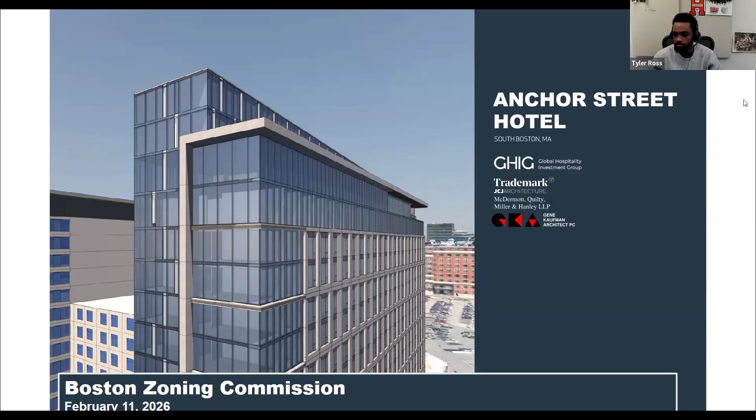My name is Jason McDonald. I'm the planner that reviewed this project. The proposed project will be a third amendment to the development plan for Planned Development Area 50, located in the South Boston Neighborhood Zoning District's D Street Neighborhood Development Area Sub-District. It is governed by Article 68 of the Zoning Code. The proposed project is also located in the Coastal Flood Resilience Overlay District, governed by Article 25A.

The proposed project is consistent with PDA 50, which is in turn consistent with the original vision for a convention center district established by the Boston Redevelopment Authority's 1999 Seaport Public Realm Plan. The proposed amendment would allow for a new 14-story hotel with a gross floor area of approximately 150,000 square feet to be developed adjacent to the existing hotels described in the PDA overlay.

The new square footage added with the existing hotels on site would be a total of approximately 478,645 gross floor area, which is under the maximum gross floor area of 899,000 square feet listed in the Second Amendment. The Second Amendment does not prescribe other dimensional limitations to the overall site besides the mentioned gross floor area.

No new uses will be introduced to the PDA. The project is subject to further design review from the planning department, with particular focus on compliance with flood resiliency requirements. I will pass off now to Mark from the development team.

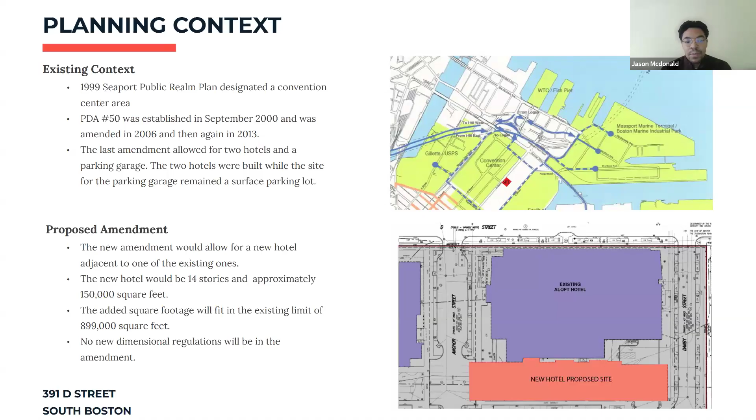Good morning, Chairman Nichols, members of the commission, and those attending. For the public, Attorney Joe Hanley, McDermott, Quilty, Miller, and Hanley. I am zoning and permitting counsel for the proponent, Global Hospitality Investment Group. Their principal for the project, Grant Nassif, is on with us, and I am here with Mark Rosenshein from Trademark Partners, who is our project manager and leader on this project. He will take you through the presentation.

Before he does, I just want to give a brief overview and also thank Tyler and Jason and the BPDA for all their work, and the members of the Impact Advisory Group, the local elected officials, and the other stakeholders that we've worked so closely with.

You will see on the screen in front of you the development site. My client, Global Hospitality Investment Group, is the owner-operator of the existing Element Hotel and the existing Aloft Hotel, which is under a long-term land lease with the Massachusetts Convention Center Authority. You'll see the site at bottom center, plan north. You'll see the Thomas M. Menino Convention Center and its lawn on D, obviously in the heart of the Convention Center campus. Next slide, please.

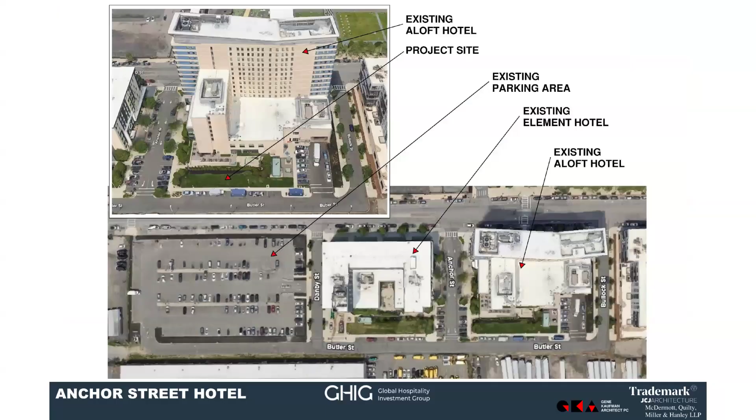So just to give you a little more perspective, plan upper left, existing Aloft Hotel. Again, this was approved, as Jason indicated, back in 2013. Our clients bought both the Element and the Aloft as constructed and have operated them since. And the site itself, which you'll see with the arrow, is in back along what's called Butler Street, which is an MCCA right-of-way owned by the Convention Center.

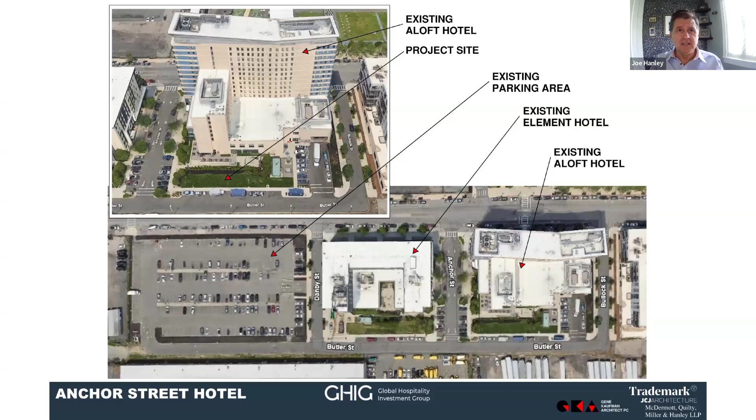And then at the bottom, you'll see it in further context. Bottom plan left is the existing surface lot, which is available and utilized by the Element and the Aloft, and has ample parking to accommodate this new third hotel. Next slide, please.

So Jason did a really good job going over this, but I'll just hit it really quickly. Again, we are here to amend PDA number 50, which was approved by this commission in 2013. It includes the two hotels that I just showed you, the Aloft and the Element, completed in their earlier phases. And what's important to note is this PDA contemplated a third hotel at this location. By its language, it merely required that we return with a development plan via an amendment to confirm that it's in compliance with the allowed dimensions, which we are.

And I think Jason did a really good job going through this. As Tyler indicated, we started the process for Article 80 large project review in March of 2025. We filed our PDA amendment in June, and it was recently approved by the BPDA board in January.

The project program is 438 lifestyle brand hotel keys, akin to select service. This is very much intended to serve both the day-to-day visitor needs for the convention center, but also be an affordable and approachable opportunity for folks in the neighborhood and the city who might have guests coming, or others seeking to stay in the area.

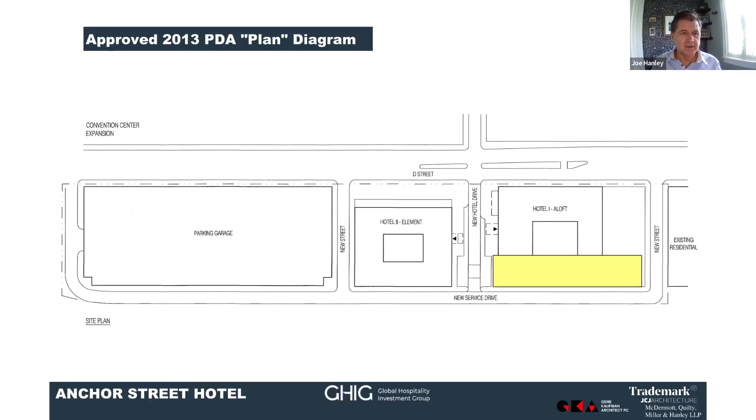So I'll hand this off to Mark at this point to show you how this all comes in context. Before I do, my client is grateful for this opportunity. We all know the convention center is doing very well, has come out of the pandemic exceptionally well. They've identified a huge need for additional stays, approximately 1,000 new hotel rooms necessary. We're very excited to be delivering nearly half of that with this PDA amendment. We thank all the stakeholders that worked with us, including the Hotel Workers Union, the building trades, and folks in the neighborhood and elected officials. It's been a very positive process for what we think will be a merit-based development that will help contribute to the future of the convention center and the neighborhood as a whole. So Mark, I'll hand it off to you.

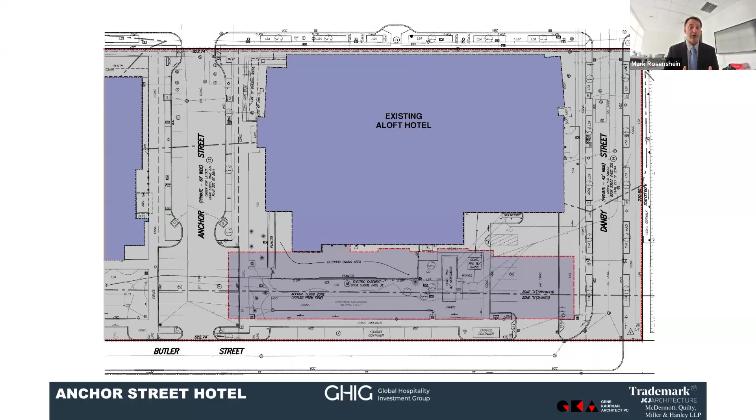We're managing the existing electrical and emergency services. For the Aloft, the generator and electrical gear are sitting on the ground right now, which means they are in the coastal flood overlay area. As part of this, we'll be lifting them up and putting them on the roof, increasing the resiliency component for the Aloft Hotel, with all of the new equipment for the new hotel also going up on the roof. This improves both properties as far as compliance with the resiliency overlay district.

Next slide, please. You can see here the relationship between the two relative to parking, which Joe mentioned. Right now parking for both existing hotels is part of a lease of spaces in that surface lot. There is more parking there than we are leasing. The MCCA controls an additional 100 parking spots; we will be leasing 75 of those in addition to the ones we already do, to accommodate surface parking for this new hotel. We expect there'll be a lot more pedestrian traffic coming down Butler Street to the new entrance, compared to the way folks go now, up to D Street to get into the Element and the Aloft.

So we've been working with the planning staff, landscape and outdoor space design folks in particular, to talk about getting some street trees, some open space, and improvements to the screening and landscape component on the Butler Street side of the Element and Aloft Hotels, to make that walkway and path better for both our guests and the general public. Next slide, please.

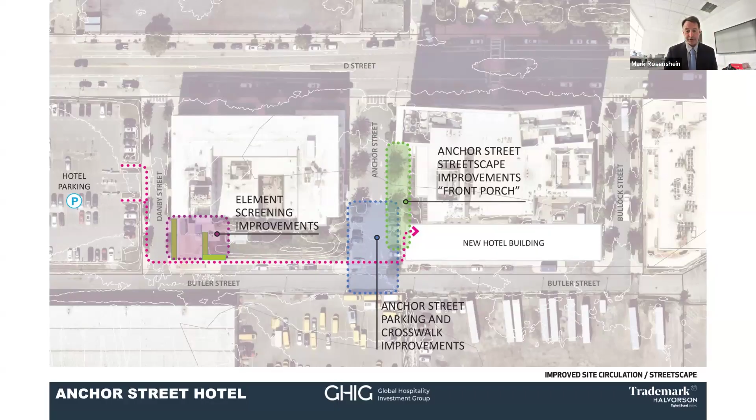This is with your orientation changed — Anchor Street is now at the bottom of the page, the main entrance. What we're really trying to do is create a plaza and an accessible moment at the entrance. Again, this is behind the Aloft Hotel; it needs to have its own front porch and its own front door. You can see the steps and the ramping, all of which is to accommodate that resiliency requirement.

Right now the site is low, down at elevation 17. It needs to be up at elevation 20.5. Where we will end up is at 19.75, and the reason we're not up at the 20.5 number is the existing Aloft Hotel, which we are connecting to, was built at that 19.75 number. So we raise it up that high, and then we will be providing deployable dry flood-proofing components at the entries and exit points around the perimeter of the building to get us up to total compliance with the 20.5.

As Tyler mentioned, they'll be continuing design work with the planning department to ensure compliance with the details of the resiliency overlay district as we get into the fine print of how to make the doors and openings resilient and flood resistant.

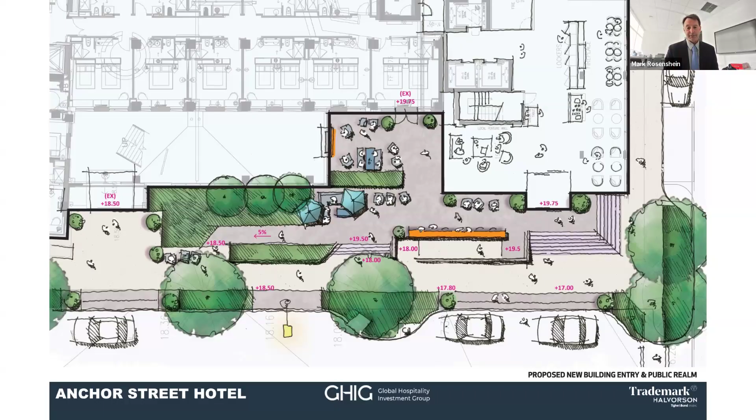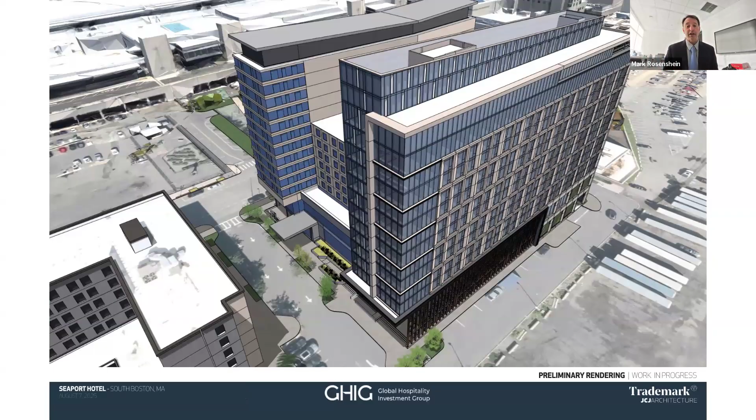There's an image of the hotel on the left side, and you're actually looking at the Aloft Hotel. We wanted the design to be complementary but distinct, so the architecture is not a great departure from the existing. We think it's a beautiful building that we currently own at the Aloft Hotel. This complements it, but has its own architecture and style, a little more glassy, a little different look to make sure it's distinct.

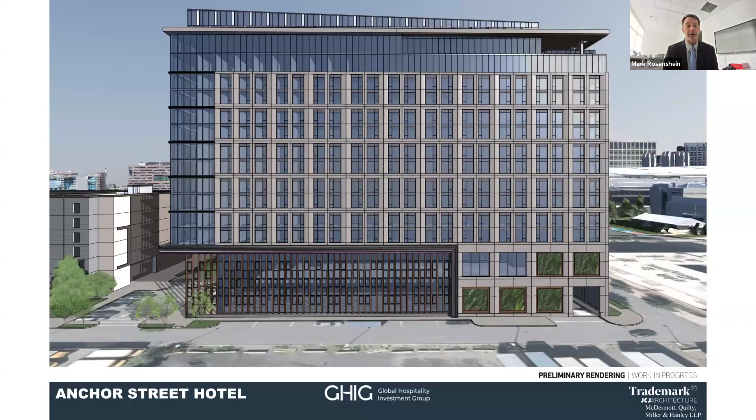From Butler Street, the side opposite the convention center, you can see we put a screen at the bottom. We're hoping to get some real growing and live space there. We've enclosed, after conversation with the planning department, the loading area that's currently open for both buildings, to make it more visually attractive, including a solid wall to the right, which will prevent visual connection through to the loading from the residential building adjacent to this one.

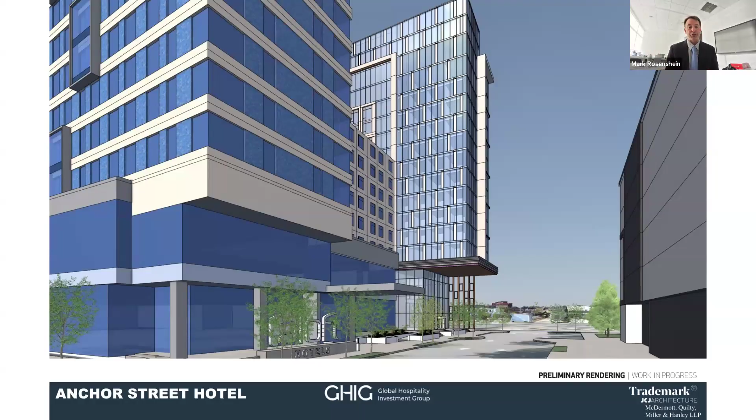This is the key view looking down Anchor Street from the convention center side, on the corner of D Street. That's the Aloft in the foreground on the left, and you can see the new hotel in the background. We cantilevered and put a canopy over that provides a real entry point and entry moment, giving it a visual face. Eventually, we'll work with the planning department to get signage approved once the flag and brand are determined. You can imagine that sign on the canopy allowing you, as you come around the corner, to see that front door and know this is a distinct and separate hotel from the Aloft.

We worked with the design team to make sure there's good articulation, that the facade is well detailed and will be an attractive building in the neighborhood.

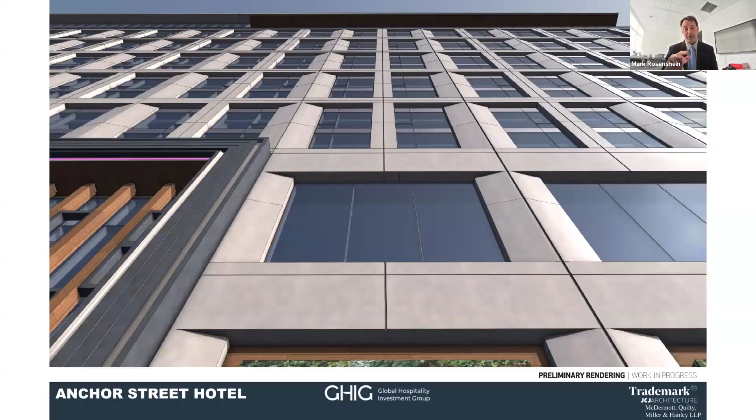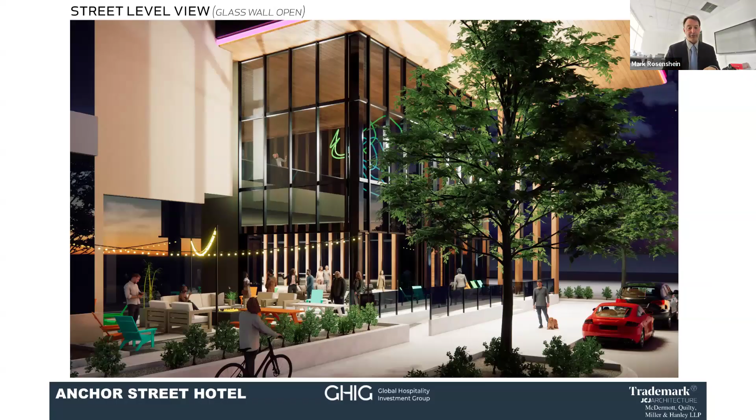The main entrance, again, we want it to be visually appealing. We've designed the corner of the building so it actually opens up. You can see right into the lobby to give an indoor-outdoor feel during nice weather, providing that porch. You can see the seating and activation area in the corner.

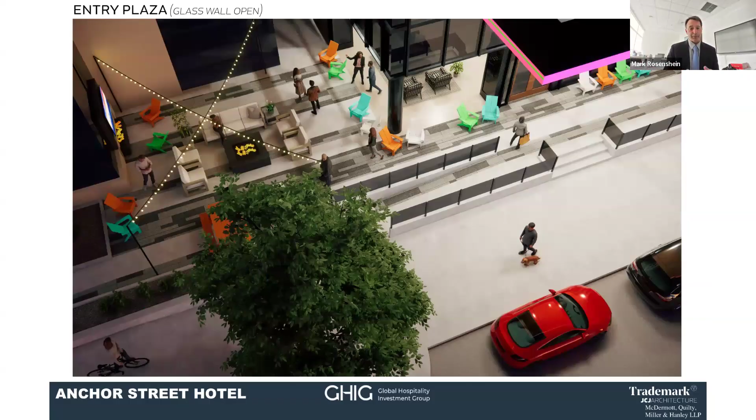We really worked to try and integrate the ramping and steps necessary for resiliency into the public realm space, so it doesn't feel like the hotel is separated from the public realm, but instead gives it good access and activation.

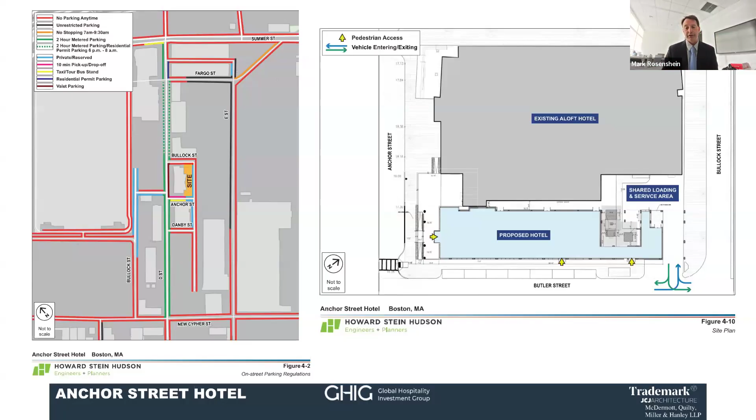We took a look with Howard Stein Hudson at the transportation. Obviously, the site was originally designed and contemplated for this hotel, so it's able to handle it from a traffic and transportation point of view. We looked at the orientation of Anchor Street and Butler. Anchor is one way, and everybody agrees it should stay one way to really allow the traffic flow to loop from D, past the hotels, do the drop off and pick up, and then loop back around on Butler. On the right side, you can see we've worked together to reduce the opening for loading and transportation access on the backside, which we've managed at the corner of Butler and Bullock.

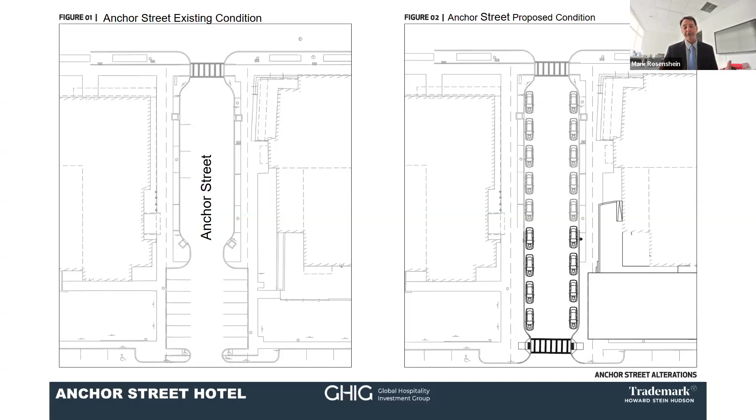The most significant public realm change: Anchor Street is not a PWD-controlled street with the City of Boston, it's owned by the MCCA. But we worked to make sure all the design features are consistent with the details of complete streets, treeways, and bikeways. Today it has this weird head-in parking condition on the left-hand side where you come down Anchor and you're backing in and out, which doesn't work well for a hotel. So we'll convert that to parallel parking with a 15-minute limit for drop-off, Uber pickup, and Lyft, really making this work better. We've worked with the planning department staff, and you can see a fully accessible crossing, which is not there today, at the end of Anchor Street, making sure the hotel and all its components meet complete streets standards and are fully accessible and functional for the new hotel users.

And there we are. That's our presentation.

Thank you, Mr. Chairman. I want to note for the record that Commissioner Miller joined the hearing at the quite early stages of that presentation. Just a couple of quick questions from me.

You mentioned in the latter part of the presentation a screen that would face the convention center. For clarity, that's an architectural feature with horticultural elements, not a digital video board, correct? Yeah, sorry, trellis would be a better word, not screen. It is not a digital anything, it's for vines and growy things to make the building look good.

Lovely, great. And then the other question is, you mentioned moving the mechanicals from the ground - would it be to the roof of the Aloft, or this new building? Both. The existing Aloft generator and electrical equipment will go on the roof of the Aloft to serve that building. The new equipment serving this building will go on this building's roof. So each will have their own standalone mechanical systems on their own respective roofs.